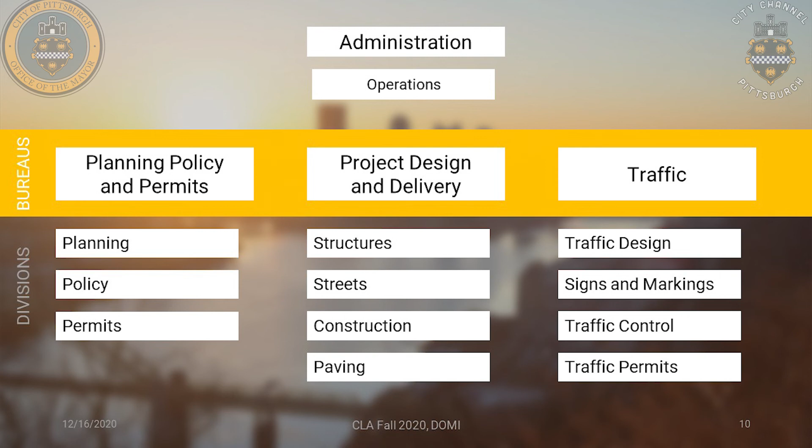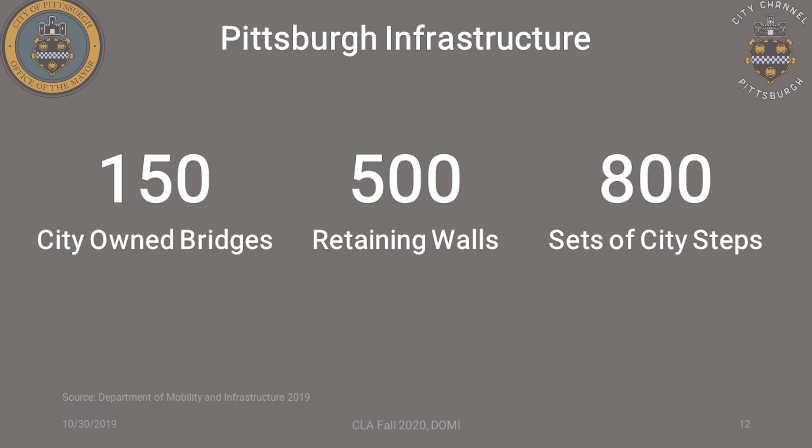As for infrastructure, the city has over 1,000 miles of streets. We have 68 miles of bike infrastructure, and a total of 611 traffic signals. We have 150 city-owned bridges, 500 retaining walls, and over 800 sets of city steps.

The 2021 capital budget, this is still in draft format. I think you guys already had a presentation with OMB. The total capital budget for the city right now is almost 125 million. You can see the big chunk of the capital budget is for DOMI, for the engineering and construction, and we're almost at $68 million.

The 2021 engineering construction breakdown for DOMI, the major projects that we have, the major dollar amount projects we have, are the TIP projects, and these are Transportation Improvement Program projects, which receive federal and state grants. These are your big projects in the city, like your Charles Anderson Bridge, your Greenfield Bridge, big dollar amount projects like that.

The second biggest expenditure for DOMI is street resurfacing. That's at 17 million. That includes your paving, et cetera, like that.

The budget, if you have any more questions about the budget, it can be found at the links provided.

And I'm going to turn this over to Angie. Angie Martinez is the Senior Right-of-Way Manager, and she's actually the acting Assistant Director for Planning. She'll be going over the planning policy and permits for the city.

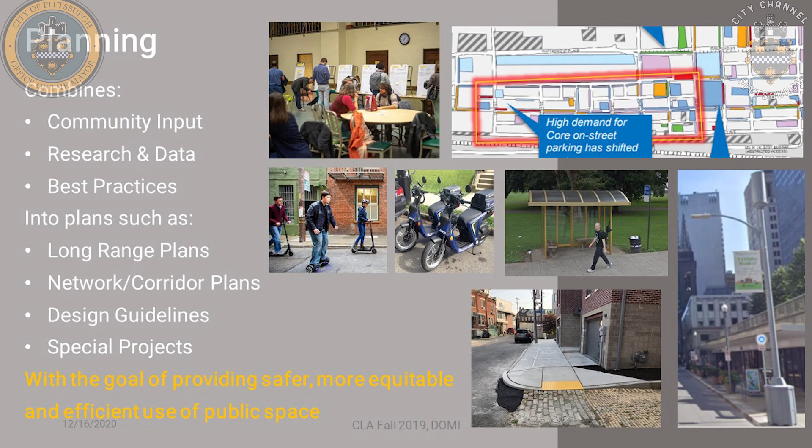Obviously, something nobody could have foreseen was the COVID-19 emergency. This impacted operations in the city at many levels. Where we felt this almost immediately was requests from the retail and restaurant industry to use public space—sidewalks, parking lanes, in some cases travel lanes—in order to provide seating areas so people could dine safely without being inside.

Another initiative we worked on in response to this was developing short-term loading zones for pickup and delivery, primarily for restaurant takeout. So far we've only issued 8 of those short-term parking zones. However, as expected, we're seeing an increase in those because of the change in weather, and also additional restrictions coming to keep everyone safe and reduce indoor dining and potential exposure and transfer of the COVID-19 virus.

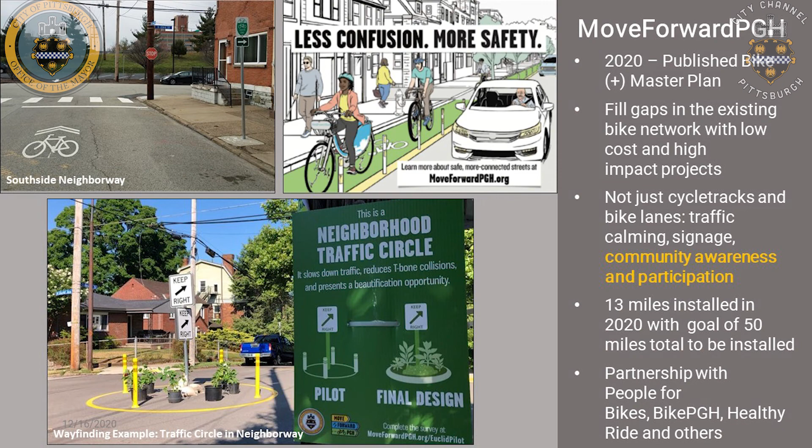That sounds ambitious, and I'm sure it's raising questions for you as Pittsburgh residents. So we provided some additional resources in this presentation where you can take a look at the Bike Master Plan, get an understanding of the importance of filling in these gaps in our existing network, the safety and environmental and other benefits that come along with that, as well as a link to our Move Forward PGH website, which I highly encourage you to check out if you haven't already been engaged in any of those projects. A lot of effort and thoughtful work has been put into making these projects accessible to residents in a way that folks feel like they have meaningful participation and understanding of potential changes in their neighborhoods and communities. You will hear much more about Move Forward PGH throughout the next several years as we continue to build out and push forward implementation of the Bike Master Plan.

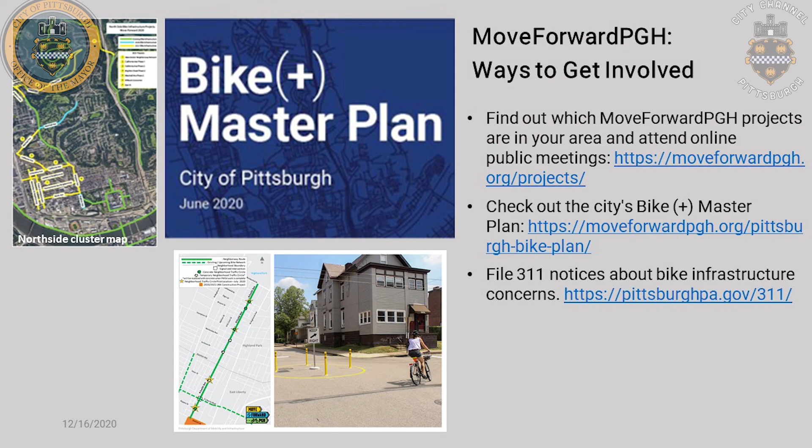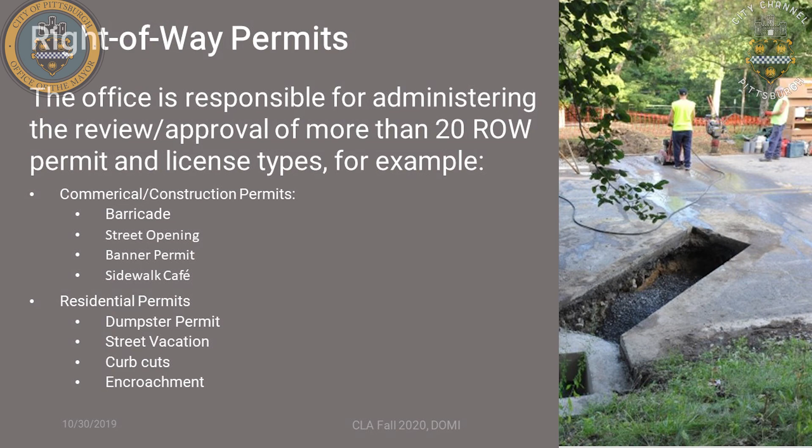One of my last slides here is sort of my bread and butter in the area of public space permits. DOMI is responsible for reviewing, issuing, and inspecting over 20 different types of permits for work or occupancy in the public right of way.

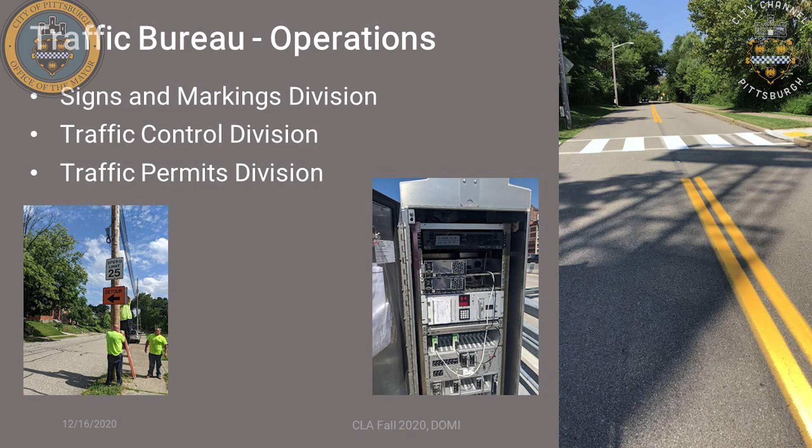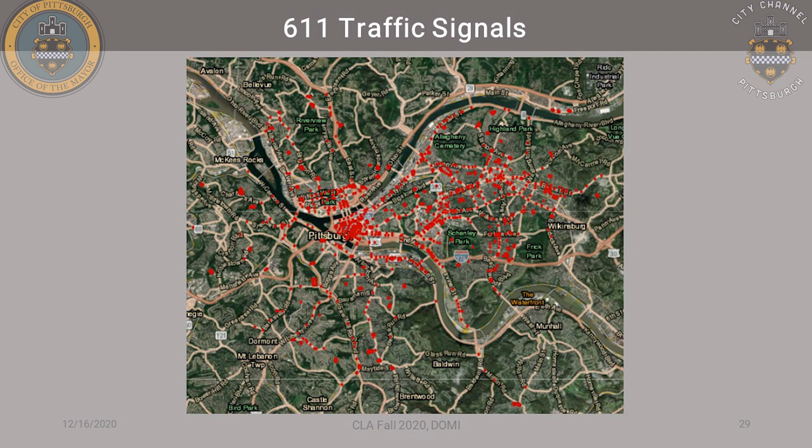To break this down a little closer, this is the image of traffic signals. The city currently owns 611 traffic signals, which I would say for a city with a population base of 300,000 people or so is a large number. Philadelphia, for reference, has 3,000 signals. New York is about 10,000. So we're much lower compared to them in terms of our infrastructure responsibilities, but still a pretty significant number for what I would consider to be a small to mid-sized city.

We have 5,000 crosswalks, and depending on what material they're made out of, we either repaint them every year, every 3 years, or if it's a road that's going to be worked on via the City of Pittsburgh paving program, we paint after the paving season.

I want to double check this number because 40,000 signs seems small based on the scope of our work. The men and women in our traffic shop are required to maintain documentation of what kind of sign is supposed to be in the field. They're supposed to know where it goes in relation to features in the roadway, and they maintain a very large file of work orders. As we receive notice that signs need to be replaced, they go out and complete that work.

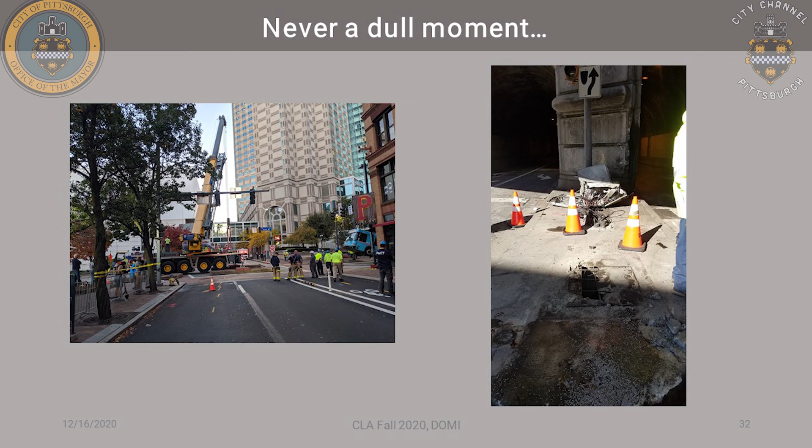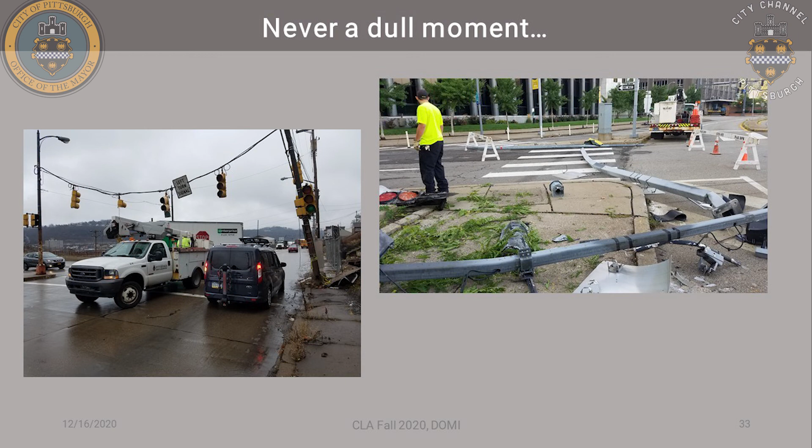To your right, we had a very devastating knockdown where a vehicle lost control coming off the ramp from the Parkway onto Liberty Avenue at Commonwealth Place downtown, wiping out 2 street lights and 2 traffic signal poles. This is a much more difficult repair because the foundations were unable to be reused. We don't do foundation work, we only do work above the ground, so we had to mobilize a contractor to pour new foundations, set new poles, and rewire the traffic signal. That's a hard part of our job and an exciting part—you never know what you're going to deal with. Your day can be completely thrown off schedule based on these emergencies.

One of the primary ways we receive feedback and the need to go out and complete maintenance work is through the city's Q Alert 311 system. We receive approximately 100 requests per week, 50 of which are purely operational—a sign was knocked down, please set it up; this sign is missing; someone stole a stop sign—those are basically just go out and replace what's there. We also receive 50 work orders requesting changes to a traffic control device, which requires an engineer to go out, evaluate field conditions, and make recommendations on whether the sign needs to be moved, removed, relocated, and so forth.

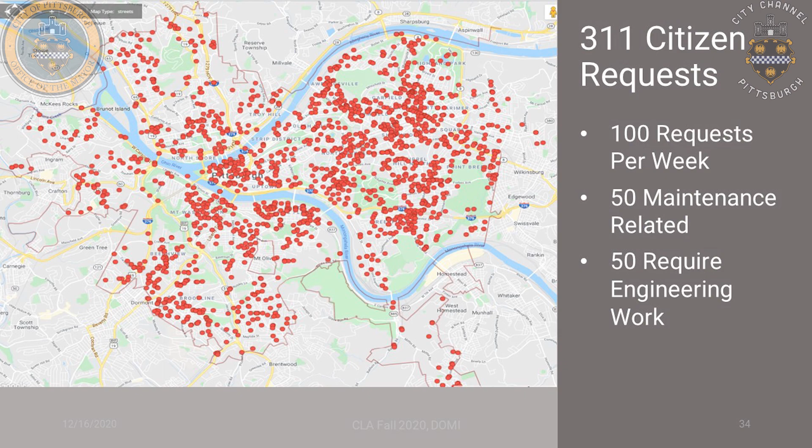Operating alongside our operations group, we have the design group, which is engineers and technicians who handle more of the design side of our projects. We do have the ability to oversee construction, and so it's a diverse task list that we end up working on.

For capital projects, once we receive notice that we have funding, we can handle design and then construction management of projects from start to finish. In a lot of cases we will look to outside consultants to provide design.

Something I didn't really appreciate how much time it would take until I started working here was that, as City of Pittsburgh's municipality, we are responsible to own and maintain traffic control devices. Outside agencies like PennDOT, Port Authority, or private developers are able to come in and complete work within city limits, but ultimately any of these decisions regarding traffic control have to make it through our department before they can be approved and permitted to go to construction in the city right of way.

So our group will also perform that design review, trying to look out for the best interests of the city. And there are currently 3 projects.

Really, I should have made separate slides for some of these, but we've gotten heavily involved with PennDOT's East Carson Street project, which is a traffic signal and safety project on East Carson Street from the Smithfield Street Bridge to 33rd, I believe.

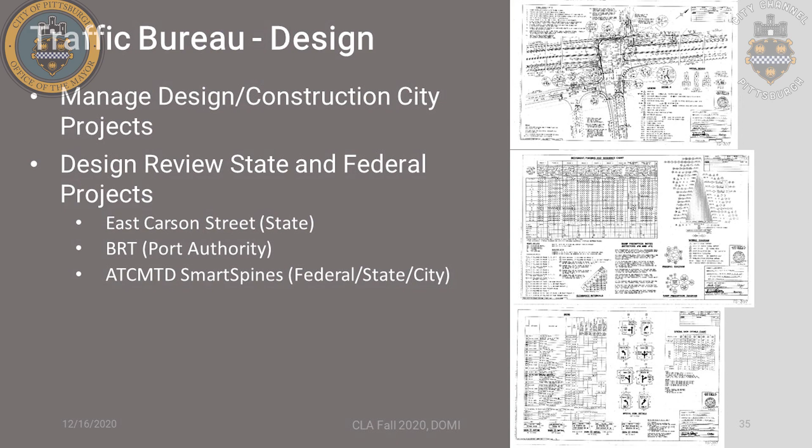2020 was not as productive of a year as we would have liked. We lost 2 months of construction season due to COVID, so it was hard. Shutting down construction was hard. At the time it made sense and it was the right thing to do, but we definitely lost time. We were able to get a fair amount of work done, and actually I'm very proud of the amount of work we got done considering the limitations.

So I'll just briefly go over a few projects. Angie earlier mentioned Move Forward, and one of the projects that resulted from Move Forward was the Marshall Avenue project, to install both a bicycle climbing lane on Marshall Avenue, as well as bring in some traffic calming aspects, such as painted curb bump outs, where we try to gore out and paint the areas near crosswalks to prohibit vehicles from parking there, to improve sight lines for pedestrians, so that way a car isn't blocking what should ideally be an unobstructed sight line from the eyes of a motorist to the eyes of a pedestrian crossing the road.

This is purely a pavement marking job, so you're hopeful that it's going to have a decent amount of traffic calming impacts. We took before and after data to try and compare and see how much of an improvement we made.

About 2% of the current motor vehicle population dropped in terms of who is speeding on this road. That doesn't sound like a huge number, and it's not—it'd be nicer to have a greater impact—but considering that's purely a paint job, it's nice to see pavement markings having that type of role. Especially since it was first and foremost a bike lane project, being able to implement traffic calming techniques along with that project kind of made it a 2-for-1, which was nice for us.

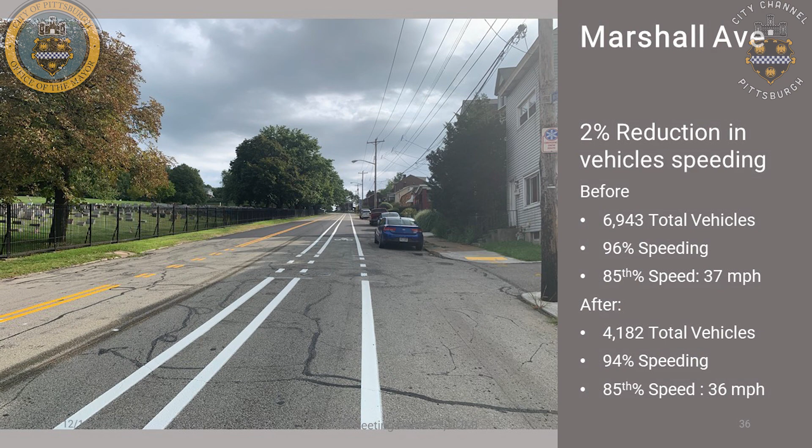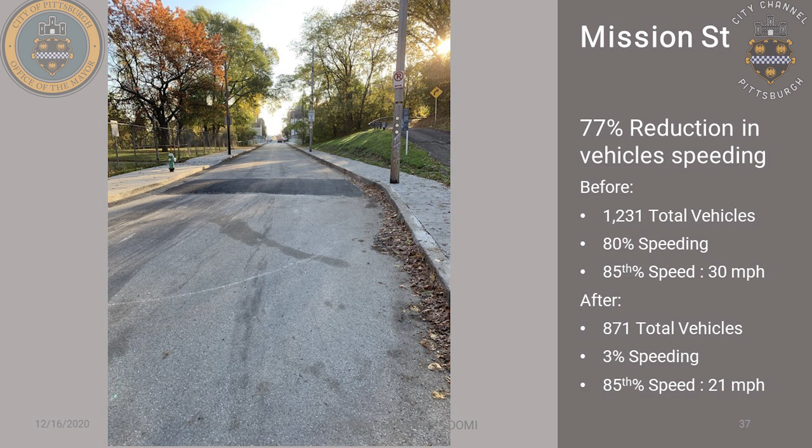On another side of things, we are constantly trying to upgrade our traffic signal inventory. We have 611 traffic signals. If I had to estimate, probably about 200 of them are at least 60 years old. It's hard to overcome that number through either outside projects by PennDOT, primarily PennDOT actually—they redo a lot of work in the city—as well as the capital budget. We are trying to replace, if we can, at least 4 to 5 signals a year.

Traffic signal replacements, as they stand today, will meet our current standards, so there'll be new poles painted in that gloss black, new signal heads which are larger with LED bulbs, and they also have back plates and reflective tape, with the idea being to provide a contrast between the traffic signal LED indications and the environment around them so that they're easier to see for motor vehicles. New traffic signals in the city will include countdown pedestrian timers, so when it changes from the walking person indication to the flashing don't walk, the signal counts down the amount of time until the phase changes, as well as audible pedestrian push buttons that provide audible cues for visually impaired users.

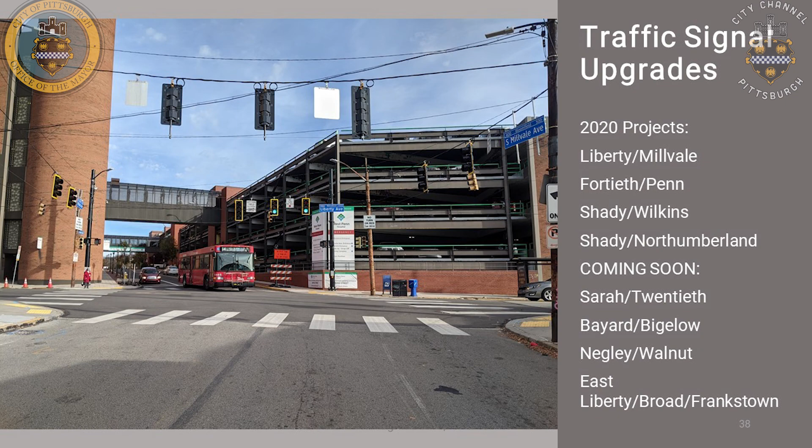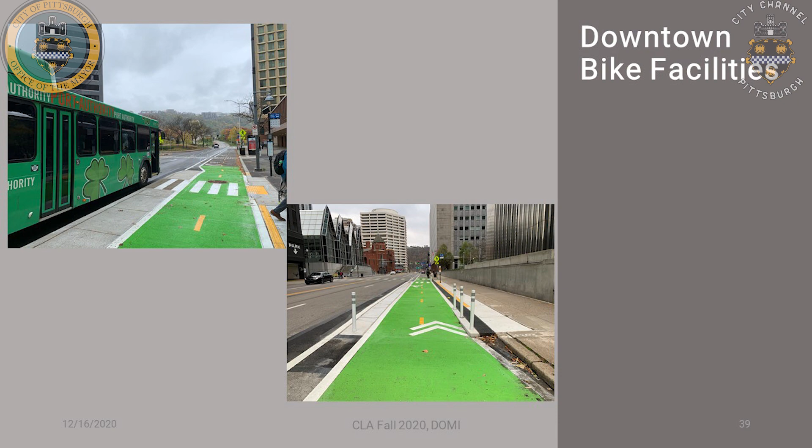All right, thanks, Mike. My internet's been a little sketchy on me, so I hope that I come through and you're all able to hear me okay.

As Mike said, my name's Eric Setzler. My role in DOMI is chief engineer. I oversee the Project Design Delivery Bureau, one of the 3 bureaus—you've heard from Angie and Mike, and I'm leading the third bureau. We are tasked with delivering a lot of the big capital projects. Mike just finished talking to you about some of our capital projects that traffic actually takes the lead on. Traffic takes the lead if it's primarily a project that has to do with traffic control devices, such as signals and pavement markings and things. A lot of the other bigger infrastructure projects are coming from my bureau. We have 4 divisions: the streets division, the structures division, and the construction and paving divisions. I'll talk a little more about them as we move through the slides here.

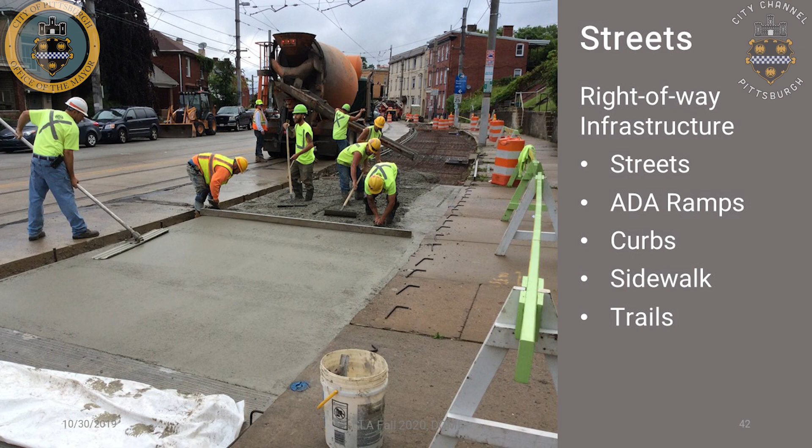That's great for if you're in a car. That's great for getting to your destination a couple seconds faster, so that you don't have to wait for the trolley when it stopped. But it's not great if you are a transit rider and you're trying to get onto or off of the T, and then you might have these cars buzzing around behind you. So if you're from this area, or if you travel through this area, you'll know that last year or earlier, we went through and we closed these slip lanes.

First we did it just using flexible bollards that are bolted down to the pavement, kind of on a trial basis to give a proof of concept that this could work and improve safety. After that, we went through in collaboration with the Department of City Planning, and this fall, DOMI installed permanent bollards. These permanent bollards are steel pipes embedded in the ground filled with concrete, so those are much more durable. We did make some adjustments based on putting up the temporary bollards and watching traffic move and interact, to try to optimize it as best we could.

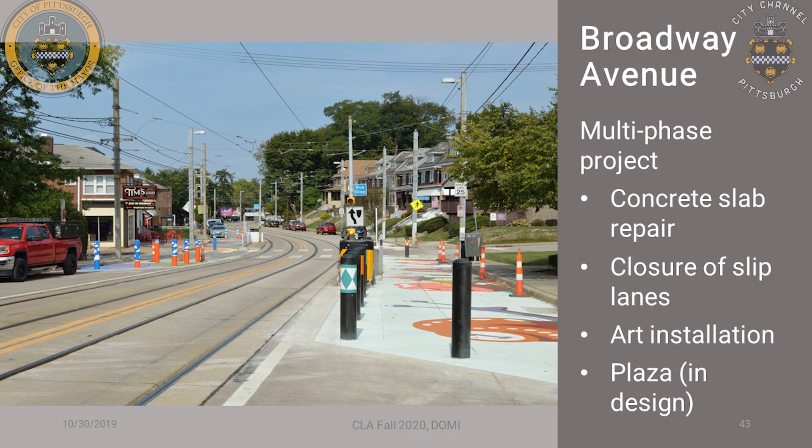So, in addition to doing projects, delivering projects if you will, our streets division is also responsible for maintaining construction standards and procedures.

Our bureau, specifically the streets division, is responsible for maintaining these standards, and they serve multiple purposes. We use these standards for our own projects, so if we're replacing a street or fixing a sidewalk, these are the standards we provide to our contractors. If PennDOT is doing a project within the city, we also request that they use our standards if it's a street, curb, or sidewalk that the city ultimately owns.

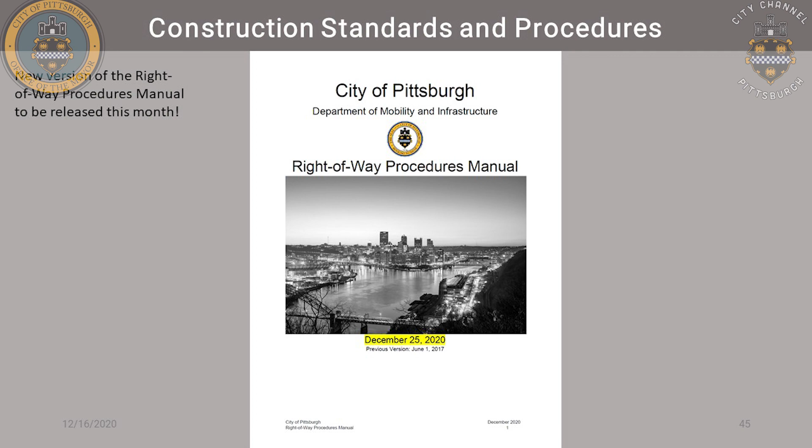On the next slide here, I have one of our other standards—this is the right-of-way procedures manual. We are issuing a new version, which should be coming out this month. The date highlighted is tentative. Our streets project manager, Mike, has been diligently putting this together. He's not going to wake up on Christmas and publish it, but I think he put that date in as a placeholder, a bit of a Christmas present to ourselves, getting this updated procedures manual out so we can ensure everyone working in the right of way does the right thing and our facilities stay well maintained and in good condition. This is available on DOMI's website, so if you need to do something in the right of way, you can look it up.

Another part of the streets division is development review. This kind of cuts across multiple groups.

City planning and PLI, permits, licenses, and inspections. Those departments are involved in development projects, and DOMI's involved to the extent that a project affects the right of way, which could be the street, the curb, or the sidewalk. So our streets engineers are tasked with reviewing their work to ensure, once again, that standards are being followed.

That if you want to have a driveway to get into a garage or a parking lot, that you're following appropriate standards. It can't come out right at an intersection because it's unsafe. You have to have a certain distance back. So there's all kinds of things that we would look at.

Tree pits. We like trees, but we want to make sure that tree pits are installed correctly, so that they're safe for pedestrians and that they're going to have successful trees. We work in conjunction with the Department of Public Works Forestry Division on that. So there's a lot, and there's been a lot of development happening in the city the last couple of years. So this is always a source of something going on that we have to keep up with and keep these things moving.

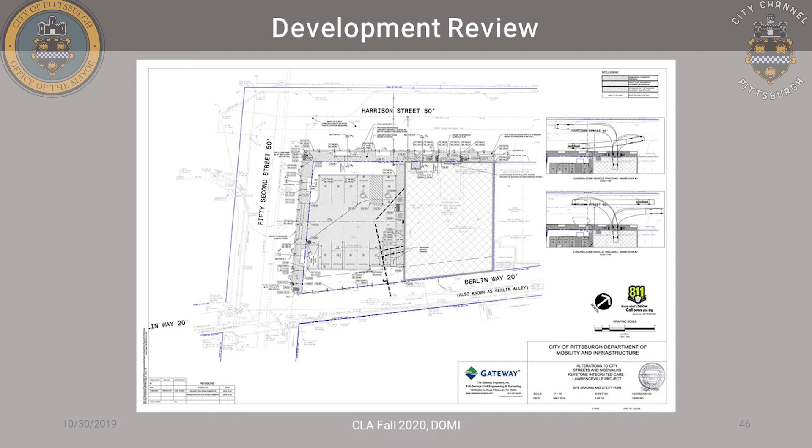Touching on another one of our big projects, this is Smithfield Street reconstruction. So this is a project that is just getting started. It's just kicking off design, but it is a total reconstruction project. This project has federal funding, which comes to us through PennDOT. So they're picking up 80% of the tab, and we have to contribute 20%.

This project is on Smithfield between Forbes and 6th. So it's a 3-block section, which is going to be completely redone. The street, including the base and the sub base, right on down to the ground, all new curbs, all new sidewalks, really giving the whole thing a fresh look, and just really upgrading all the infrastructure, everything you see and everything that you might not see as well.

This street has a lot of components - it's not a huge street. The street's not terribly wide, but there's a lot to fit in there. So it'll be an interesting challenge to make sure that we are apportioning this limited right of way to the best uses and to accommodate all the different uses as best we can.

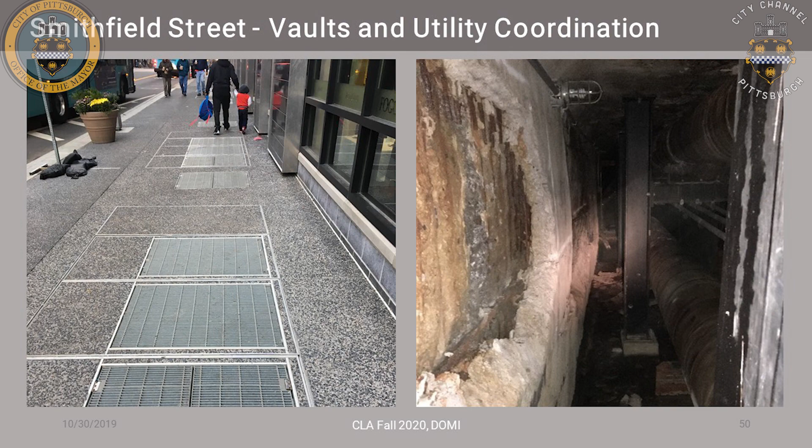Moving over to our structures division. So the structures division is responsible for structures. I guess, as it might sound obvious, but what is a structure? So bridges are the big one. We have, I think we said earlier, about 150 bridges in the city that the city is responsible for. There are also bridges that either PennDOT or Allegheny County are responsible for, but we have about 150 of our own.

We have a lot of retaining walls. We have a lot of city steps. It's not totally unique to Pittsburgh, but we have a very large collection of steps, which I think we're all pretty proud of, but they also suffer from a lot of deferred maintenance.

A landslide is not really a structure, but it does fall under the structures division. We've had a lot of landslides the last couple years due to steep slopes, underlying soil conditions, and some of the heavy rains we've gotten.

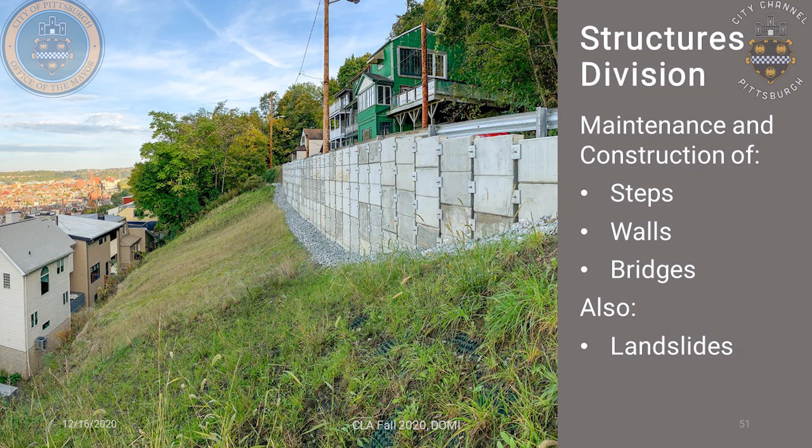Sometimes the result of a landslide is that we need to build a wall to fix it. This picture is an example, on Newton Street in the South Side, on the edge between South Side and Arlington, right off of Arlington Avenue. There was a pretty big slide in, I believe, 2018, and we ended up constructing this wall. It's built with steel I-beams drilled and placed in the ground and embedded in concrete, with precast concrete panels placed between the beams to create the wall.

Total bridge length is about 760 feet, and it's a truss bridge. Actually, it's a Wichert truss, which is a relatively rare form of truss, so it does have some historical characteristics to it.

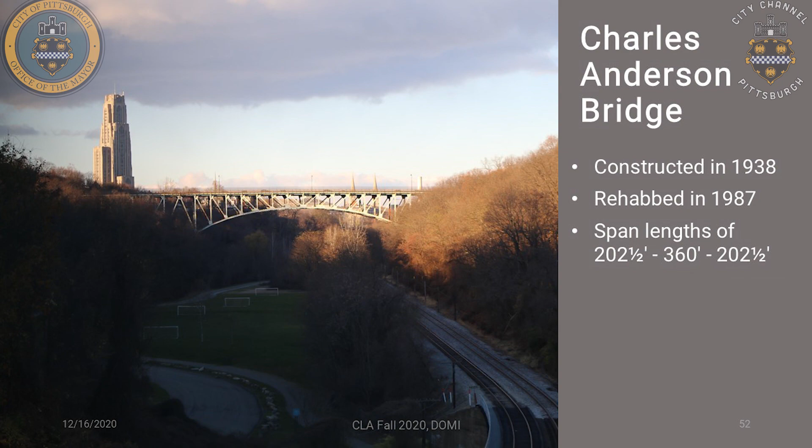We are responsible to inspect our bridges; it's mandated by the federal government. Routine inspection has to happen a minimum of once every 24 months, or every 2 years. For bridges with more critical members, they might be required to be inspected more frequently. The Charles Anderson Bridge is inspected every year at this point because it's a truss and because it does have some deterioration.

It has a weight limit on it, which is less than the full legal loads, because of some of this deterioration. So it's on a 12-month inspection cycle, meaning every year we're looking at it. Occasionally there could be a special condition where we'd look at a bridge more often, even down to every 6 months.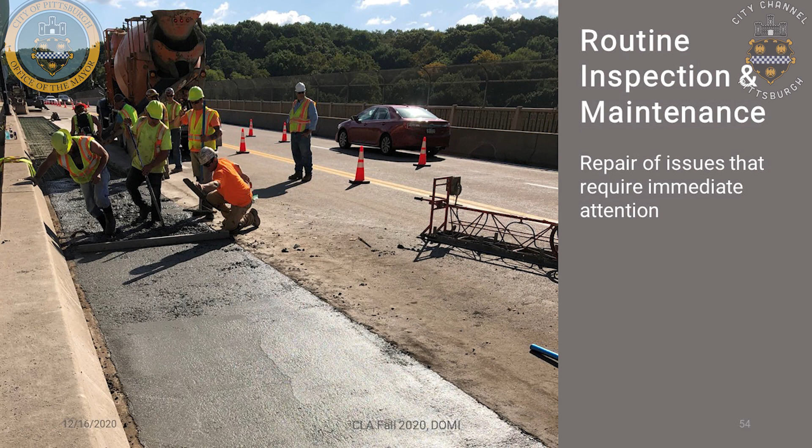As I mentioned, we are looking at a major project, and the design effort is underway. We are studying to determine if it will be a major rehabilitation of the bridge, which would involve replacing the concrete deck, doing extensive repairs on the steel truss, fixing anything deteriorated, replacing rusted components with new ones, and then completely repainting the entire bridge.

Or there is also a possibility it would go to a replacement structure where we'd build an entirely new bridge. Since this bridge is a Wichert truss and is considered historic, we need to look at if it's feasible to rehab the bridge and meet our need. If we can rehab it, then we will rehab it, and we are in the process of determining that right now.

Part of determining if it can be rehabbed is determining what we need the bridge to carry. Currently it is 42 feet wide for the travel-way, carrying 4 lanes of traffic, which is a little on the narrow side for 4 lanes. It has two sidewalks, which are really only about 5 feet clear once you account for the fence and railing.

That's a bit narrow both for pedestrians and for vehicles, and it doesn't have any good place for bikes. So we are looking at various options. Some of these were just nice sketches that were proposed. These don't necessarily correspond to anything we are going to do. We haven't come to those determinations yet, but it shows there are various options you have to look at with vehicle lanes, shoulders, sidewalks. Bike facilities are important to us.

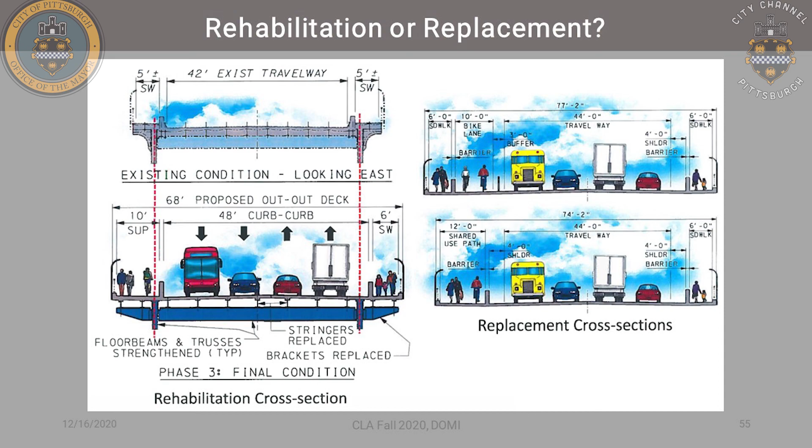The sidewalks were closed a while back, and then half the bridge was closed, and then more recently the entire bridge was closed to vehicles, where pedestrians and bikes could still use it. The design effort on this project had been going on in various phases for almost 20 years. There were a lot of complications.

If you've been in the city for a long time, you may have been somewhat aware of it. There was a lot of discussion back and forth with the railroad. Ultimately, we're having to raise the bridge some to provide additional clearance for trains underneath. But anyway, the project is happening, so it's very nice.

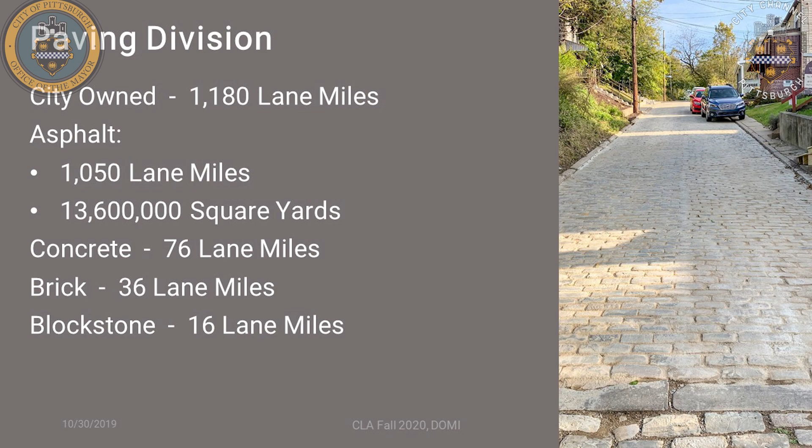So how do we figure out what to pave? Of course, that's a big question for many people - hey, you're going to pave my street. We have more paving needs than we can do each year, so we do try to prioritize. We look at a lot of different things.

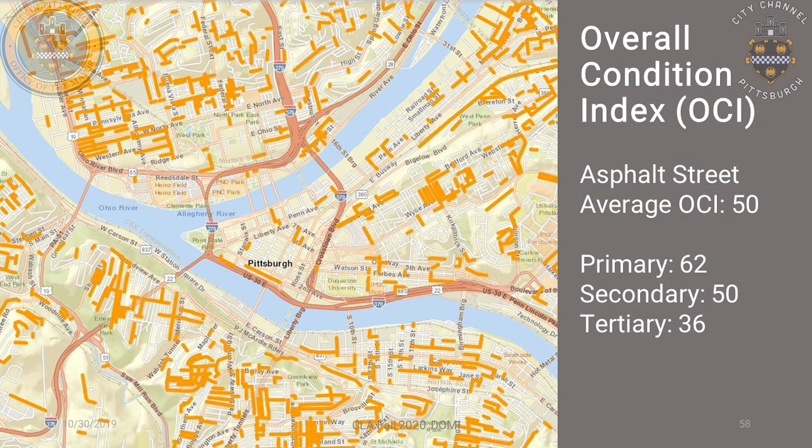Our average is about 50, and for primary streets, which are the more major streets, the average is a little higher, 62, which is probably good - you want to keep your busier streets in as good a condition as you can. The secondary streets are right around 50, and the tertiary streets, which are your small ones, your alleys, streets with very low volume, typically narrow streets, unfortunately they're not quite as good a shape. Their average OCI is 36.

The street selection process is actually starting right now for next year. Our 2020 paving season is done, but we're gearing up for 2021. Our paving division goes through Cartegraph and pulls the data, looking at condition, and they pull out the bad streets and start there. Of course, there's usually more than you can get to, but we start there.

We do get a lot of community input. There are 2 main ways that happens. One is through paving requests put into the 311 system. We collect those over the course of a year, and currently our paving division is assessing all the 311s received over the past year, collating them and working that into their evaluation matrix.

We also solicit input from each of the city council people. Of course, they know their districts best and also usually have direct communication with their residents, so they will provide input.

We also reach out to the utility companies for 2 reasons. One, no one likes to pave a street and then have a utility come by 3 months later and cut it up to fix a line. We really want to avoid that. So we tell them what we are planning to do, and if they need to do something, they can get in first. Or if they have a project next year and we say, hey, we're going to pave this street this year, they say, oh, we have a project next year. Then we say, okay, well, we'll hold off. We're not going to pave this year if you have to dig the street up next year.